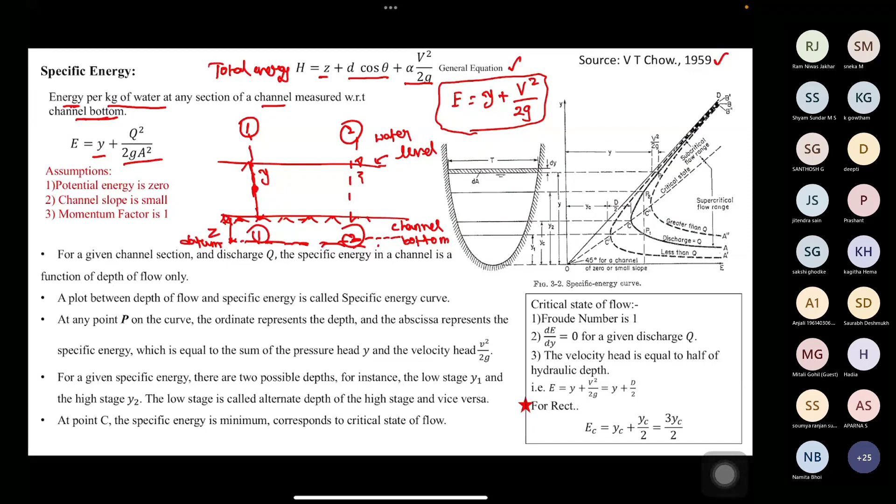But as we know, so... can you mute yourself? Gagan, kindly mute yourself. Yeah. See, one more warning. Please kindly mute yourself during the lecture, because others may feel discomfort. Okay. Thanks, sir.

Okay. So where we are: specific energy is nothing but energy per kg of water at any section of a channel with respect to the channel bottom. That is the definition for specific energy. In the textbooks, you may have seen the formula in this format: E equal to y plus V square by 2g, where V square by 2g is kinetic energy, or we can even call it kinetic head, y is datum potential head, and E is the total specific energy per kg of water.

So what are the assumptions we made to derive this specific energy? First assumption is that potential energy is zero, which means that Z equal to 0. From the total energy equation, we neglected the datum energy component, making it 0. As well, channel slope is small. Here if you see d into cos theta, we assume that theta will be very small. That's why we neglected it.

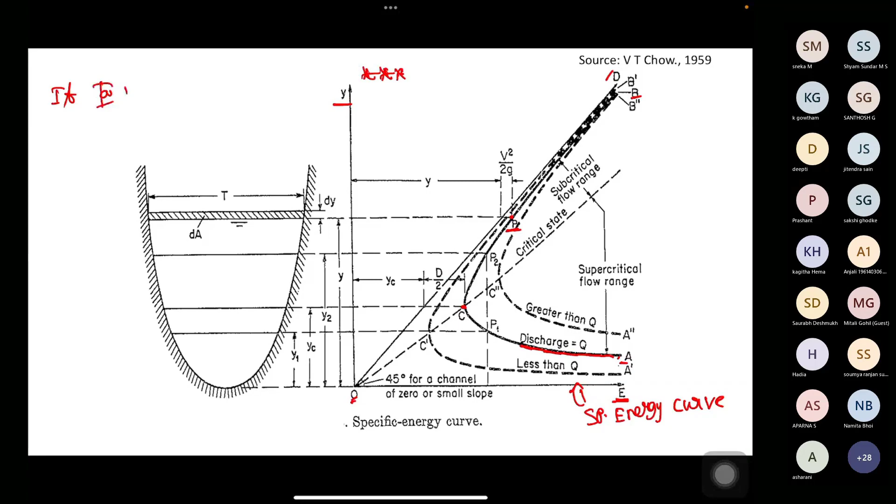Here this dark black color is the curve, which has two limbs: one is AC, another is BC. And it has a 45 degree line, O to D. What can we interpret from this curve? Suppose I take any point P here on the curve, what does it represent? If you look at here, y... even I can zoom in.

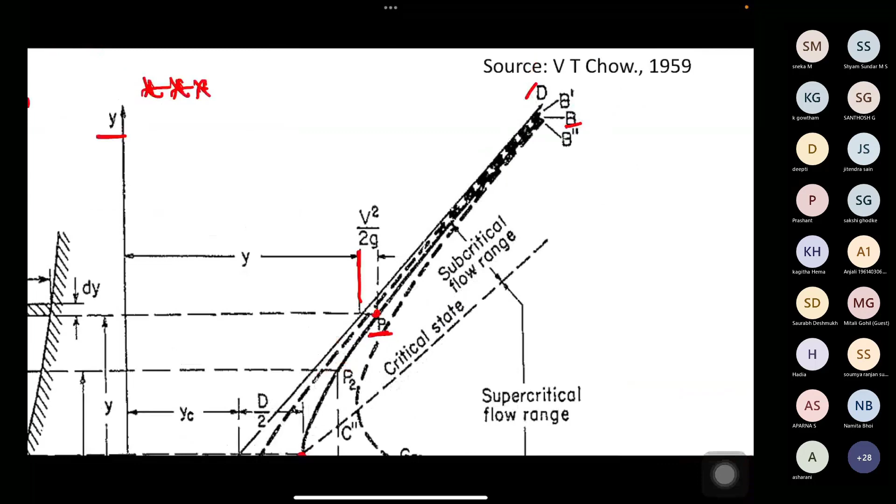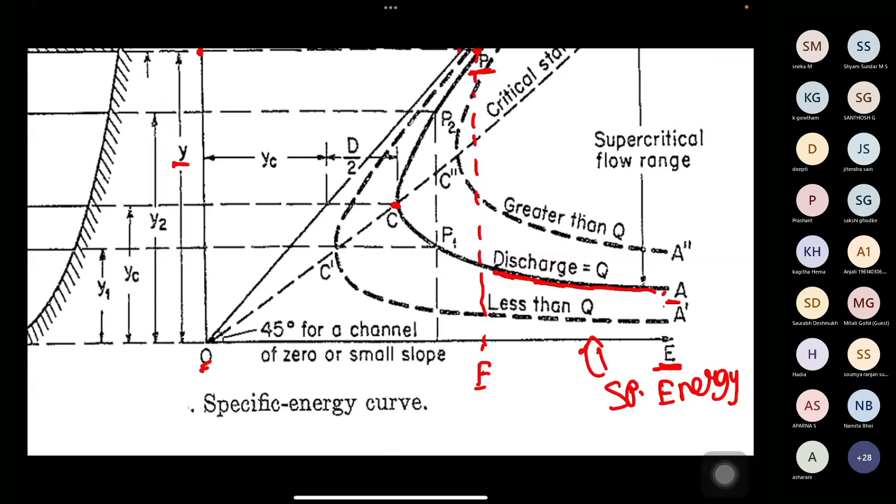Okay, if I take point P here, it contains two components, y plus v squared by 2g. And suppose if you narrow it down here, that is E, which is the sum of y plus v squared by 2g, and correspondingly we will have a depth which is equal to y. Additionally, if you look more clearly at this graph, suppose this is one line we have drawn.

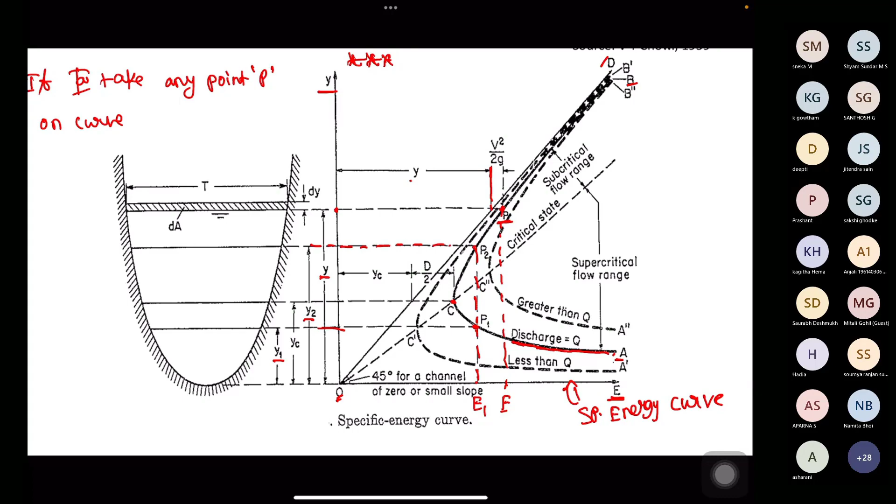For any given E, we are observing two depths. One is y1, another is y2. So what are these two depths called? These two depths are called alternate depths. This is very important for the IES exam. Suppose I take E1 here; this E1 is showing two depths, y1 and y2, for the same specific energy. These are called alternate depths.

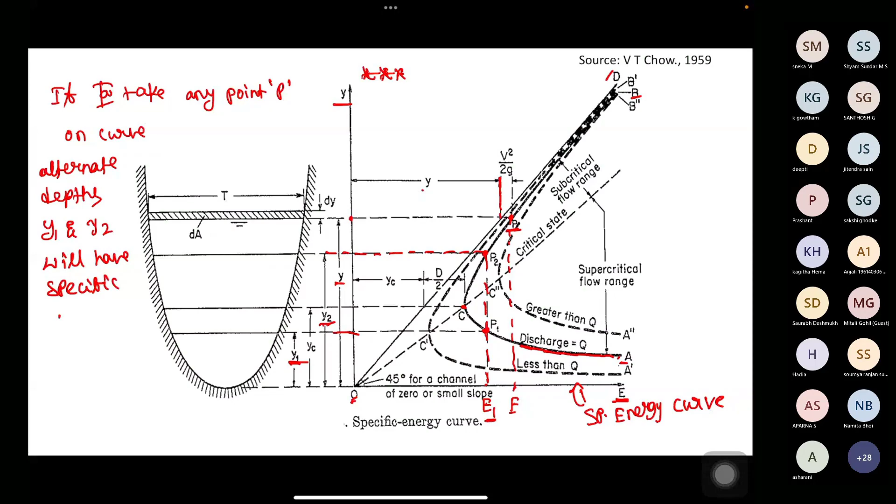There is another similar term called sequent depths. I think most of you know, sequent depths will have the same specific force, whereas alternate depths will have the same specific energy. Whereas sequent depths...

These curves are drawn for a given channel for a given discharge. Let's say in the channel we have another q value. If the new q is greater than q, then the curve will shift to the right. If the new q is smaller than q, the curve will shift leftward. This understanding will help you in solving questions on channel transition, where they ask: if I raise the bed by a height z, what will happen to the flow depth? These kinds of questions you may see in the GATE exam, like flow over a hump.

Suppose I decrease the width of the channel, what will happen to the flow at the top of the hump, or at the channel transition? All these kinds of questions you might have seen. To solve those questions, a clear understanding of the specific energy curve is required. If the flow is more than the given flow, then the curve shifts to the right. And if you observe this y2, and one more thing you can observe here,

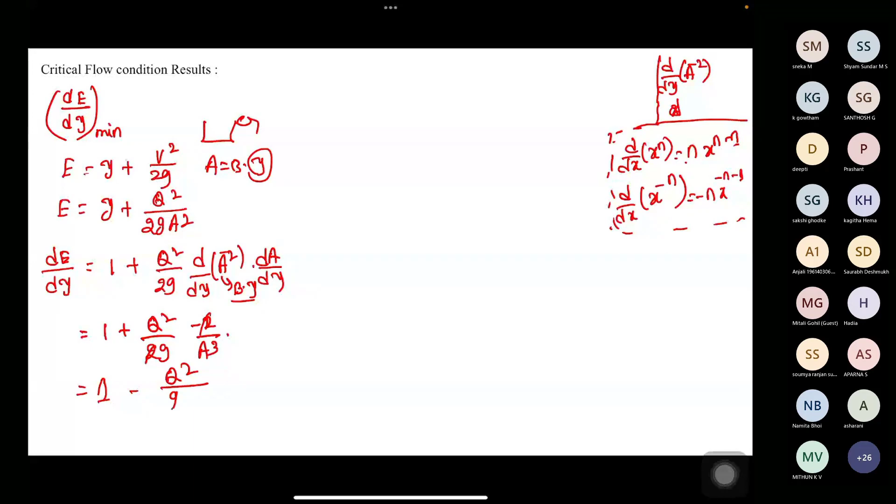Now the 2 gets cancelled, then it will become q square by g a cube into dA by dy. From slide 1 we have seen dA equal to T into dy. So as I mentioned, for a critical flow condition the derivative is equal to 0. Then 1 minus q square T by g a cube equals 0, so q square T by g a cube equal to 1. This is the first result, and a very important result for solving all types of questions in open channel flow.

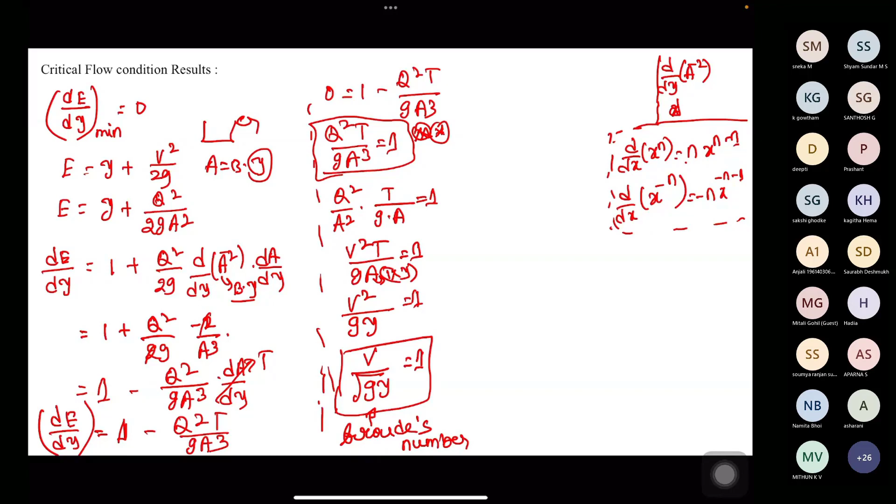Now let's further simplify this. As we know, velocity is equal to q by a. So I can replace q square by a square, then T. If I take the square root on both sides, can you see what exactly we arrived at? Froude number. So the definition of critical flow is: when the Froude number is equal to 1, the flow is said to be critical. So from the specific energy, we arrive at the Froude number. This is the second result.

There is another important result. From the same equation, q square T by g a cube equal to 1. You know the term discharge per unit width, small q, which is Q by T. If I expand this, with a equal to T into y, q square by T square into 1 by g y cube equal to 1. So this becomes q square divided by g y cube equal to 1. At critical flow, yc cube equal to q square by g, and yc equal to q square by g whole power 1 by 3. This is a very important result for solving problems.

Now the fourth important result. Sorry, I don't have space, maybe I can solve here. Again we go with the same Q square T by g a cube equal to 1. As we know, v equal to Q by a. So v square T divided by g a equal to 1. So v square divided by g into a by T equal to 1. If I write v square by 2g, it will equal y by 2.

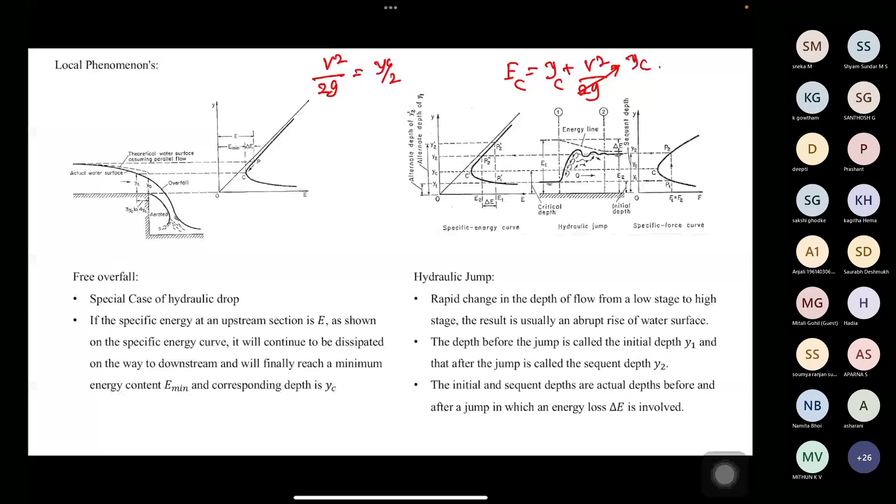So as we know, E equal to y plus V square by 2g. If I replace with yc by 2, then Ec equal to yc plus yc by 2. Then it will become 3yc by 2. Okay. So this is another important result, and yc equal to 2/3 of Ec, where Ec and yc are with respect to the critical. Okay.

So I hope you remember the result. So the critical formula is this one only: Q square T divided by g A cube. This is the critical formula. If you know this particular formula, you can derive all the formulas with respect to the critical flow.

So let's solve one question from GATE 2010, a 2 marks question. This is question number 41. This question is as follows. They have given the Froude number of the flow in a rectangular channel: a rectangular channel has a Froude number of 0.8 and a depth of flow of 1.5 meter. Now they have asked us to calculate the critical depth.

So anybody, can you try and give me the answer quickly? I'll give the hint. We just now solved it. So use the same Q square T by g A cube equal to 1. From this relation only you can derive. You can directly solve this question. Maybe you need to do a few steps, but you can solve this question.

So look at this question. What we know is Fr, which is 0.8, and we know the flow depth, 1.5 meter. So how can we solve? We know the Froude number equation also, V by root of g into y. We just derived this here, equation number 2. So can you quickly say the answer, anybody?

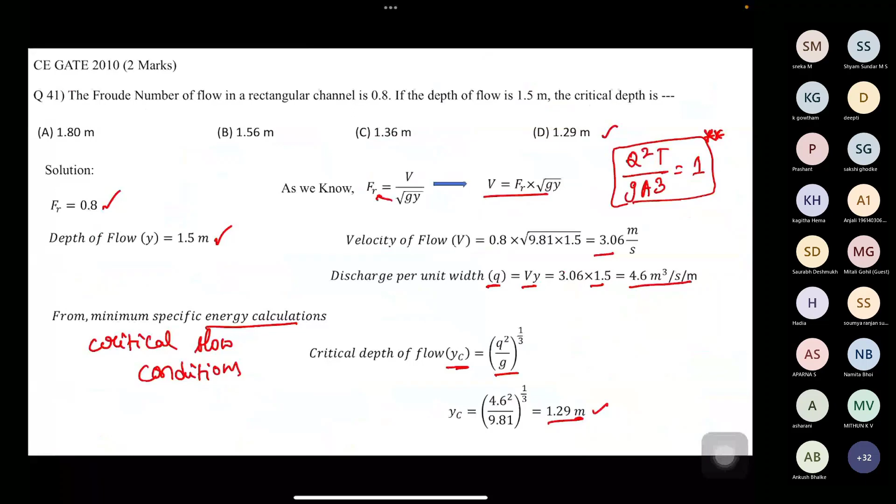So this is our first question. Let's solve a somewhat different question from the same GATE 2010. This is also a 2 marks question. Even without solving, you can guess the answer. Most of you know this question, I feel. This is question number 40 from GATE 2010.

The question is as follows: for a rectangular channel section, Group 1 lists the geometrical elements, and Group 2 gives the proportions of hydraulically efficient section. So in Group 1 we have these parameters, and Group 2 has the corresponding formulas for a hydraulically efficient section. Our job is to match Group 1 and Group 2, where YE is the flow depth corresponding to hydraulically efficient section. So what would be the correct answer here?

D, sir. D. D, sir. D. Okay. D. Yes. So can anybody explain what is the hydraulically efficient section? You mean? It delivers maximum discharge economically, sir.

Okay. Correct. So when we say any channel section is hydraulically efficient, it means that it should deliver maximum discharge, and the lining cost should be minimal. There are 2 conditions to be met. One is that the provided channel section should be able to deliver the maximum discharge, and the cost of lining should be minimum. So now let's see how we can derive this particular condition.

Okay, where n is the Manning's roughness coefficient, R represents the hydraulic radius, Sf is the slope of flow, V is the velocity, A is the area of the channel, and Q is the discharge. This is the Manning's equation we use for calculation of discharge. If the channel is said to be hydraulically efficient, then the cross sectional area is constant, bottom slope is constant, and resistance coefficient is also constant. Then Q is directly a function of hydraulic radius.

What is the hydraulic radius? It is the ratio of wetted area divided by the wetted perimeter. Okay. Wetted perimeter. Now it is mentioned that the cross sectional area is constant. Then to make R maximum, what do we need to do? We need to reduce the wetted perimeter. If we minimize the wetted perimeter, R will increase.

Proportionally, discharge will increase, because Q is directly proportional to R. If R increases, discharge will increase. So how can R increase? If we reduce the wetted perimeter, then R will increase. Let's derive how we can reduce this P for a rectangular channel. So this is a rectangular channel.

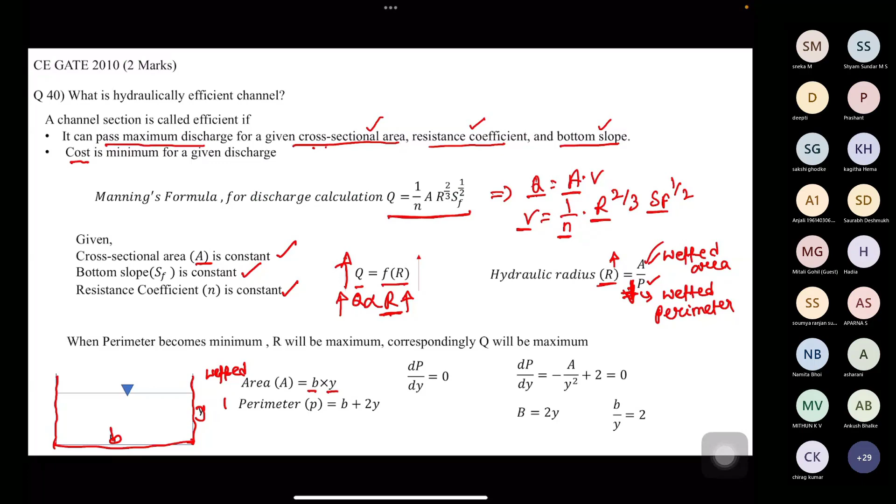So now our job is to minimize the wetted perimeter, dP by dy. So now let's solve. As we know, A equal to B into y. So what is B? B equal to A by y. Because we are differentiating with respect to y, I wanted to bring all the terms in y. So P equal to A by y plus 2y.

dP by dy will become minus A by y square plus 2. I'll show how we got this one. A is a constant here because it is given. So d by dy of 1 by y: y power minus 1, then minus 1 into y power minus 2, which is equal to minus 1 by y power 2. So in this way we got this.

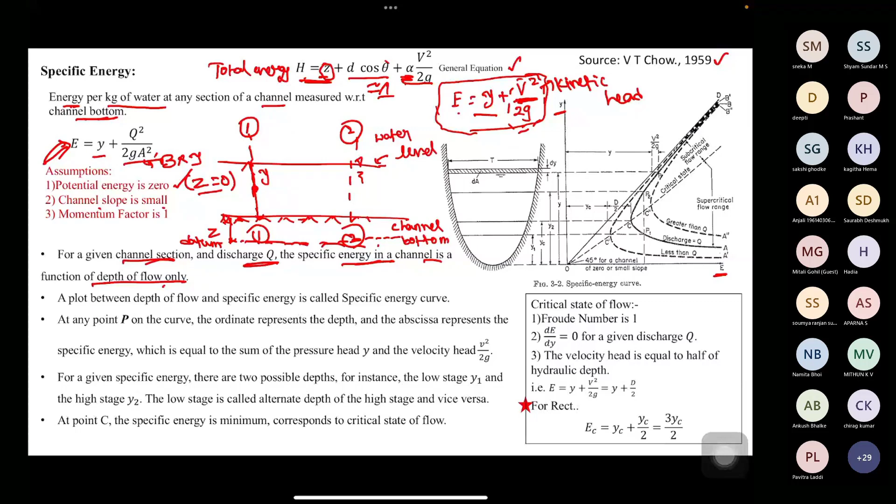So in the specific energy curve, we discussed what the specific energy definition is. Specific energy is nothing but energy per kg of water at any section of a channel with respect to the channel bottom. We have seen what assumptions we made to derive the specific energy, as well as what exactly the specific energy curve shows us.

So in the specific energy curve, we have seen there are two depths. One is y1 and another is y2, and these two depths have the same specific energy, and these two depths are called alternate depths. Okay, and we have another term called sequent depths in hydraulics, that will have the same specific force.

This sequent depth we'll see in a hydraulic jump lecture that I may take maybe in the next class. In that class we'll see what a hydraulic jump is, how we can compute the sequent depth, what is the relation between the sequent depths and all. Okay, so for the time being you can remember the definition. The sequent depths will have the same specific force, whereas alternate depths will have the same specific energy.

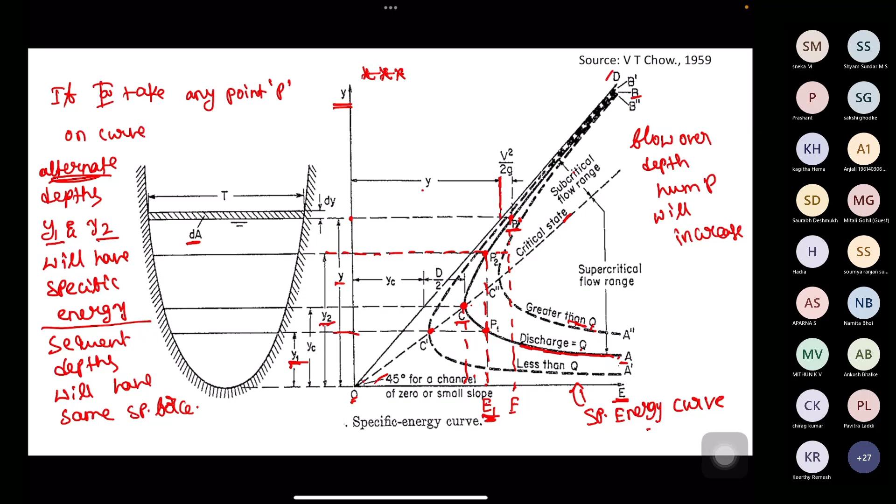Okay, and we went on to the critical flow condition results. So the main question is what is critical flow? Critical flow is a state of flow where the specific energy is minimum. You can also see in many textbooks they say critical flow will have a Froude number equal to 1. That is another definition of critical flow. When the Froude number is equal to 1, the flow is said to be critical flow. If the Froude number is more than 1, we can say the flow is supercritical flow. If the Froude number is less than 1, we can say it is subcritical flow.

And we even derived the Froude number equation from this specific energy curve here. Okay, equation number 2, and we derived one general condition for the critical flow, which is Q square T divided by g A cube, which is equal to 1. If you remember this particular equation, you can solve all types of questions with respect to critical flow. Okay, and we went on to the V square by 2g equal to y by 2 relation, as well as the yc equal to cube root of q square by g relation and all.

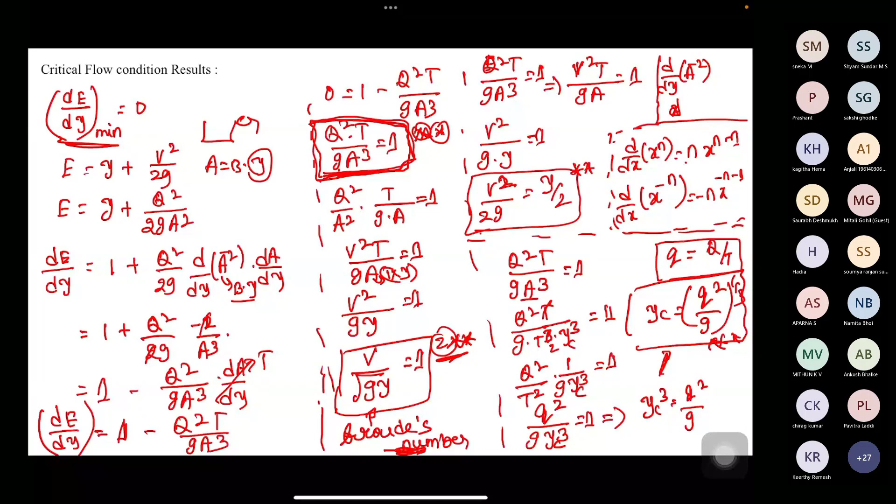Then we solved two questions from GATE 2010. This question is of 2 marks, and the question number is 41. In this question, our interest is to calculate the critical depth, and we have seen the steps. In the first step we calculate the velocity, in the second step we calculate the discharge per unit width, and in the third step we did the critical flow depth computation.

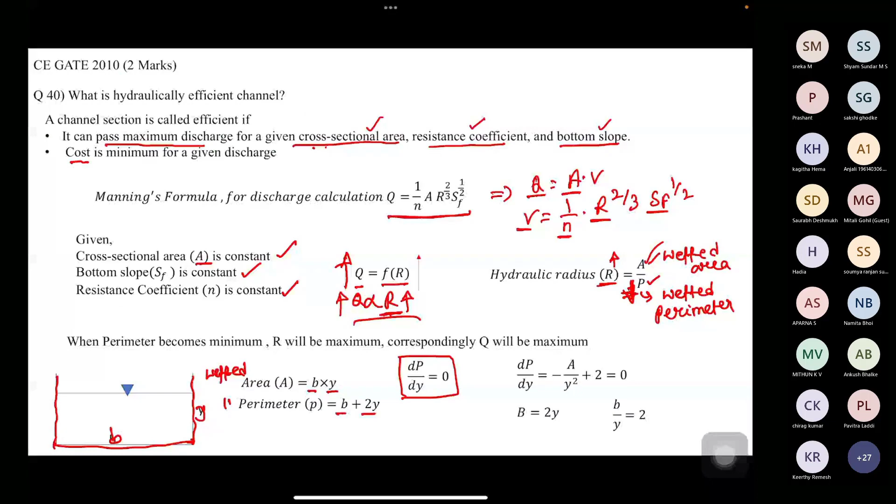And the next question was about the hydraulically efficient section, and we have seen what we mean by the hydraulically efficient section, and what conditions it should meet to be called a hydraulically efficient section. And we even derived how we can calculate the flow channel parameters and all, and we chose the final answer as C. So this is a summary of the class.